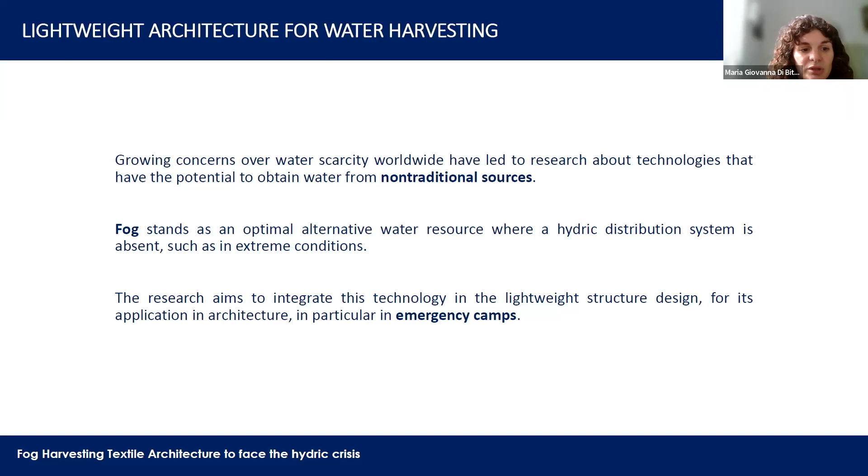So as we know, the water crisis is becoming more and more serious. For this reason, it is important to study non-traditional water resources. In particular, one of them is fog. Fog water has been documented to be an optimal source of water, especially in territories that lack a water distribution system. This is because fog harvesting is a kilometer zero technology, but I will explain this in a moment. So our proposal is to develop a lightweight textile architecture for fog water harvesting to be integrated into emergency camps.

So again, fog is an alternative water resource useful to face the hydric crisis in certain areas worldwide defined as fog oases. The extraction of water from fog is a passive system which works by gravity thanks to the fog collector, which is a device composed of a mesh and a supporting structure. Depending on the location and the components, the water collected can range from 2 to 22 liters per square meter of mesh a day. Nowadays, in the projects developed for fog harvesting, the water is used for agriculture, reforestation, and community use.

Even though it's a promising technology, it has some weaknesses: it is a lone and fragile structure, and the technology has a limited application field. What we are trying to do is to improve its efficiency and expand the application field, for example, in the application of emergency camps.

So what is fog? It is a meteorological phenomenon consisting of water droplets suspended in the air. From a physical point of view, when a saturated mass of air reaches its dew point, fog is generated. There are, however, different mechanisms and conditions for achieving this state, for which it is necessary to distinguish fog depending on the formation process. And not all of them are suitable to be harvested with fog collectors.

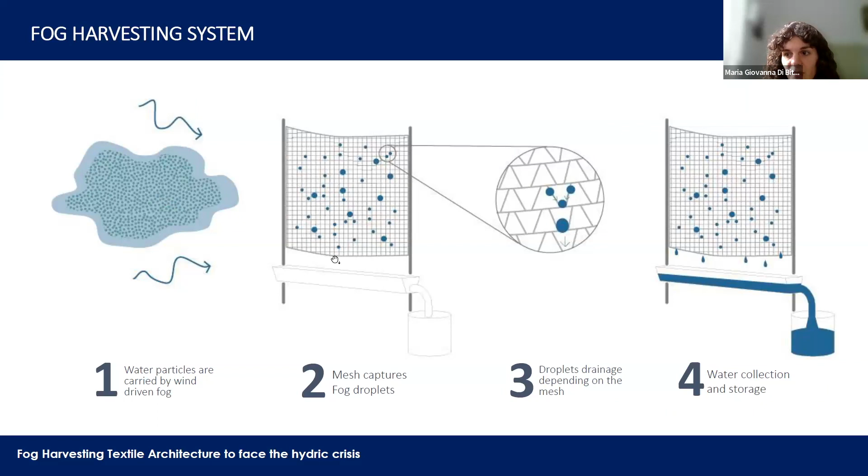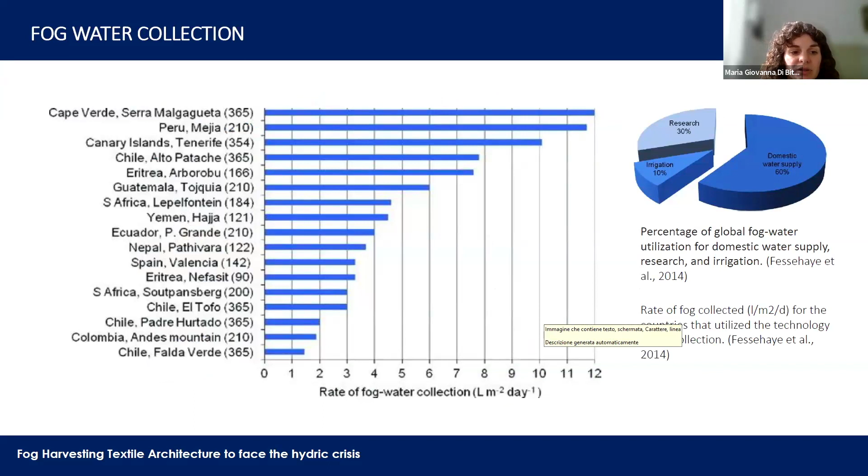So as you can notice from the graph, the quantity of water collected may vary from location to location. Here, for this graph, all the tests have been developed with the same mesh and structure. So it's just a matter of meteorological conditions of the location. So now that we know how fog harvesting works and the device useful to collect water, I'm going to present you why and how we want to apply this technology to emergency camps.

Generally, in emergency, water is extracted from near surface waters like rivers or lakes, which are often contaminated, or from underground aquifers. And when a water source is lacking, it is provided by water tank trucks. And a remedy for these difficult situations can be fog harvesting. Many areas affected by extreme events in need of emergency camps also correspond to fog oases.

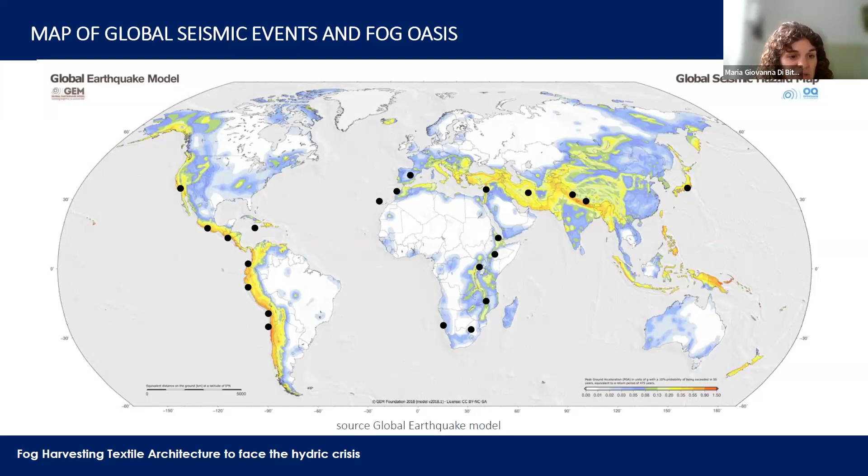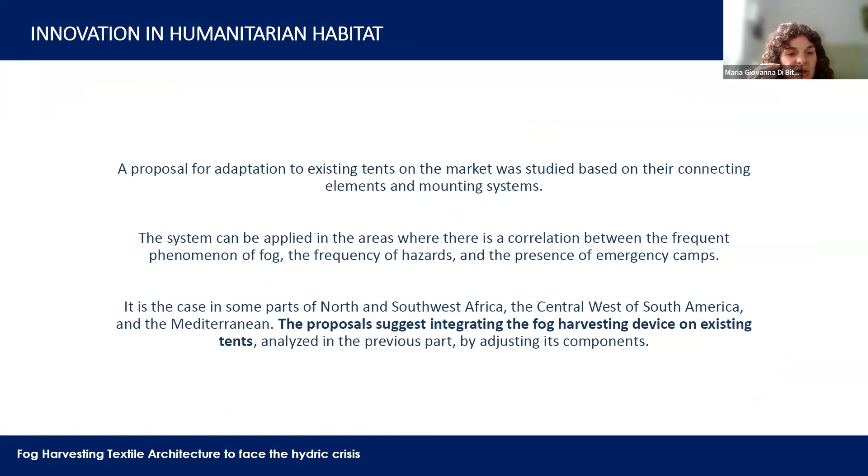So we have seen that the fog collector is a very simple structure, and we are envisioning the integration in emergency camps, and we analyzed some tents.

We took as a reference the multipurpose tent designed for the Speed Kit project, a collaboration between Politecnico di Milano and Ferrino. This tent is already used in many projects.

A single unit can host 5 people and is composed of aluminum poles and joints, all equal. All the connectors are the same, but just by rotating them, you can achieve different angles to create the roof, for example, and this is to facilitate the setup in emergency contexts.

What we were looking for in this study of tents were ways to integrate two systems: the sheltering and the water provision. We noticed that a simple bidimensional fog collector can be applied in many cases, just integrating it using the elements already required for the assembling of the tents. This is useful because we can apply this technology in already existing camps with this type of tent, but also in new ones.

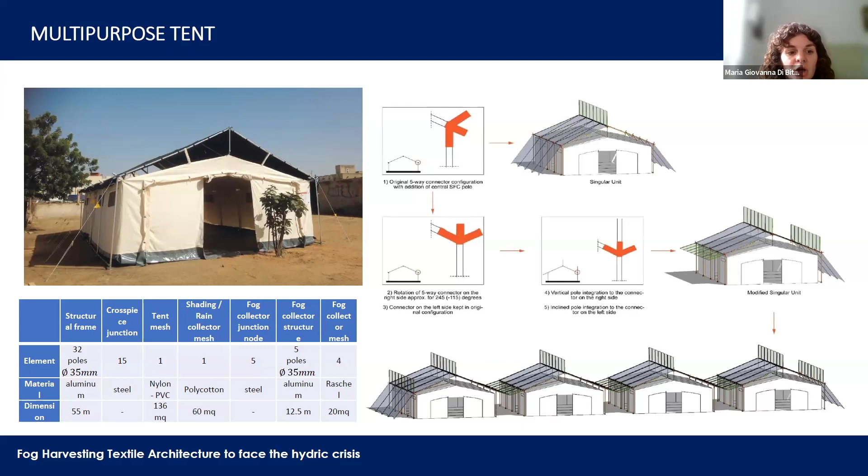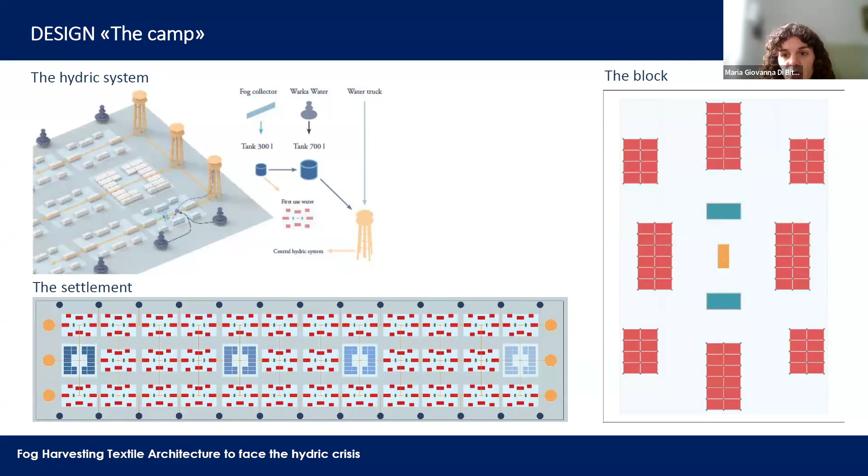Thanks to its design, we can rotate it. So as you can see in the image, when it's standing up, it functions as a fog collector, but by rotating it, it can provide a shading roof for the external part of the tent.

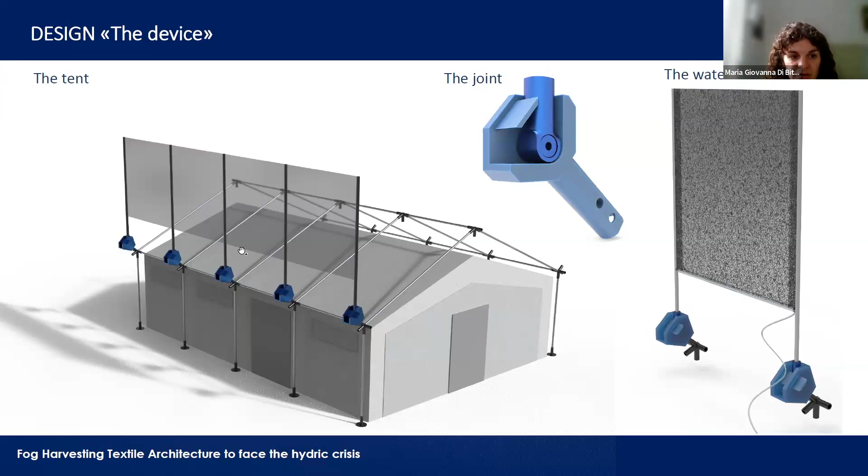We developed an analysis of different territories. Here I'm reporting one of the Sahel region in sub-Saharan Africa, which is also the area where some camps that use the multipurpose tents are located. As you may know, this region suffers intense droughts, but in the last few decades it's also been affected by rainy periods, and some fog harvesting projects have been developed here, particularly in Eritrea and Ethiopia.

So even though it's a very dry region, we can take advantage of the atmospheric water, so rain and fog. The water requirement in an emergency situation per person is 15 liters. In Eritrea, from the literature review developed, it emerged that we can have a collection of 3.1 liters per square meter of mesh a day of fog.

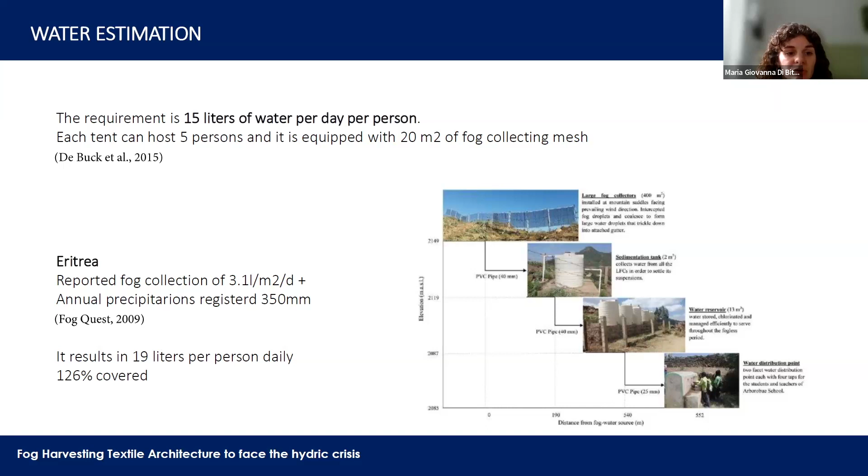If we sum up also the quantity of water we can collect from rain, together with the fog collector applied on tents, we can obtain 16 liters per person a day, even more than the standard requirements.

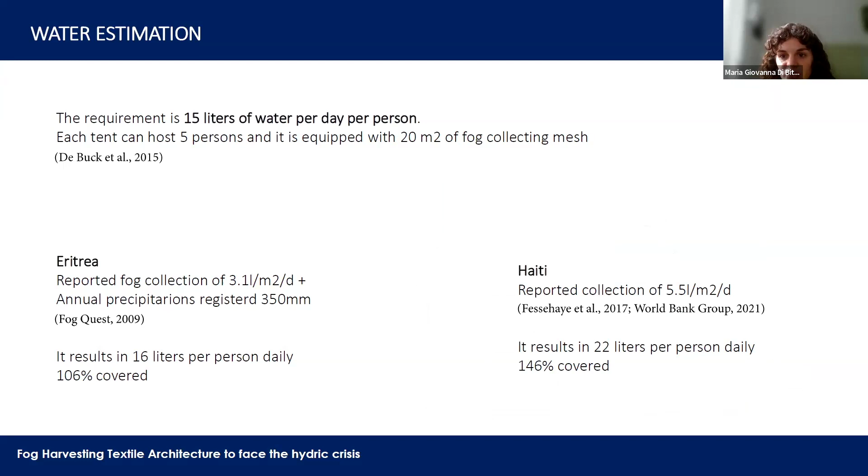We developed another analysis in Haiti, where the collection of fog water reported is 5.5 liters per square meter of mesh a day. In this case, just from fog water, we can obtain 22 liters daily per person, which means the inhabitants can use the water to develop some activities or small businesses, other than just survive.

From an economical point of view, the cost of a large fog collector, the most common one presented at the beginning, is about $1,500, and we can assume the cost of the structure proposed for the tent is almost the same. The collectors we propose are smaller, but there are more of them, so the price should be equal.

Considering a lifespan of 10 years for both the mesh, because after exposure to sun and wind it degrades in 10 years, and the permanence of the temporary shelters, since the tents should be temporary, we can have the cost per liter of water collected be less than the current market price of water in this area to be competitive.

However, it's slightly higher. But in any case, from an environmental point of view, fog harvesting is more convenient because it doesn't rely on energy to function or on water tanks that are supposed to come to the camp.

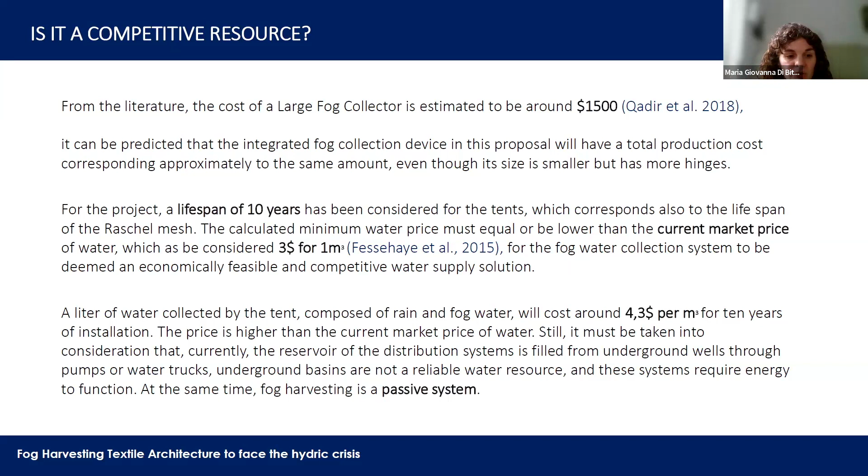Regarding the quality of water, many tests have been developed worldwide on the water collected, and generally they meet the WHO standards, so it doesn't require a filtration system, and it's also less risky to use.

Of course, when implementing a new project, some primary tests should be developed on this water. It usually is not contaminated, unless the location of the camp is near a polluted area like factories or similar.

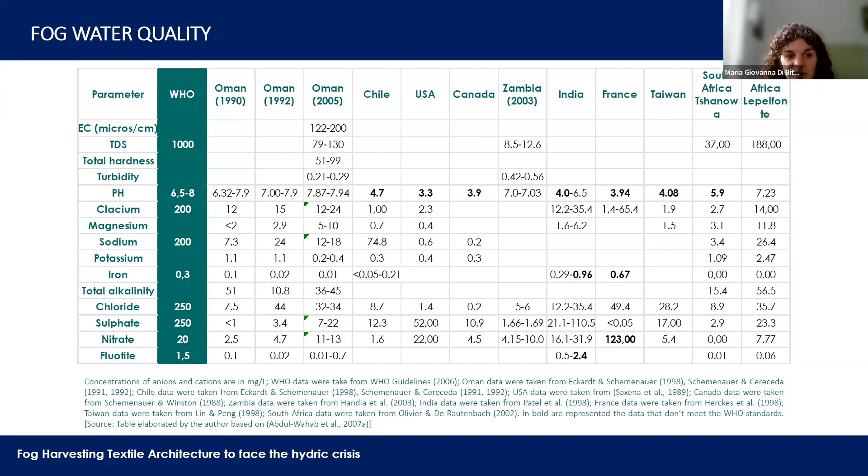Regarding the mesh, here are some examples. In my research, I've tested many meshes, both in the field and in the lab, to test their performance. The most used is the Raschel mesh, which you can notice in the first image, the one used in agriculture. Among the meshes tested there is also the mosquito net and some spacer fabrics.

Considering the price, the mosquito net costs as much as the Raschel net, but it collects almost double the amount of water.

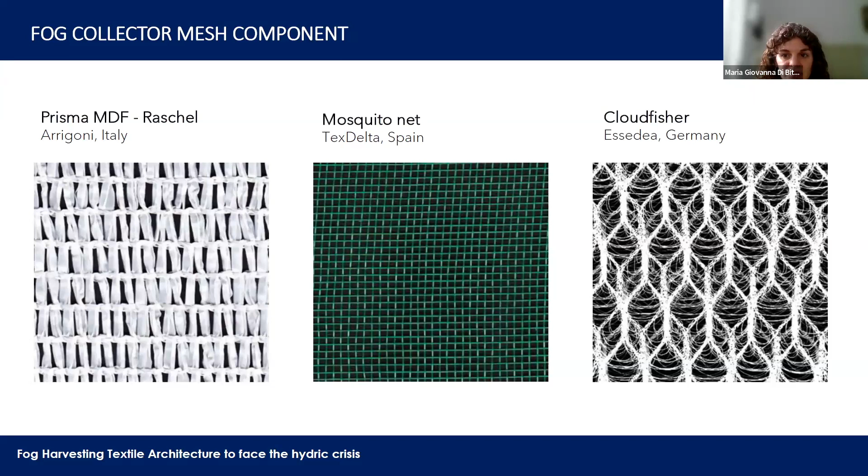The spacer fabric costs 10 times more than the Raschel mesh, but it collects 5 times more. It's also more resistant, so it can resist more than 10 years. Depending on the location conditions and the requirements of the project, the lifespan and the budget, a different mesh should be selected. I must underline that the mosquito net used for this type of project doesn't have the repellent treatment on the surface, so it's safe to use.

To conclude, water is becoming more and more a scarce resource. It is defined as the blue gold of the 21st century. In this scenario, fog stands as an optimal alternative resource in fog oasis locations. So we should give it a try to this new technology. Thank you.

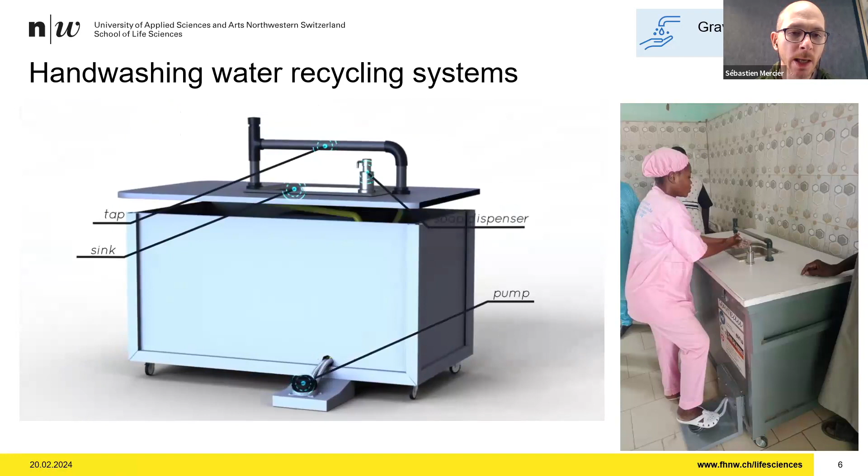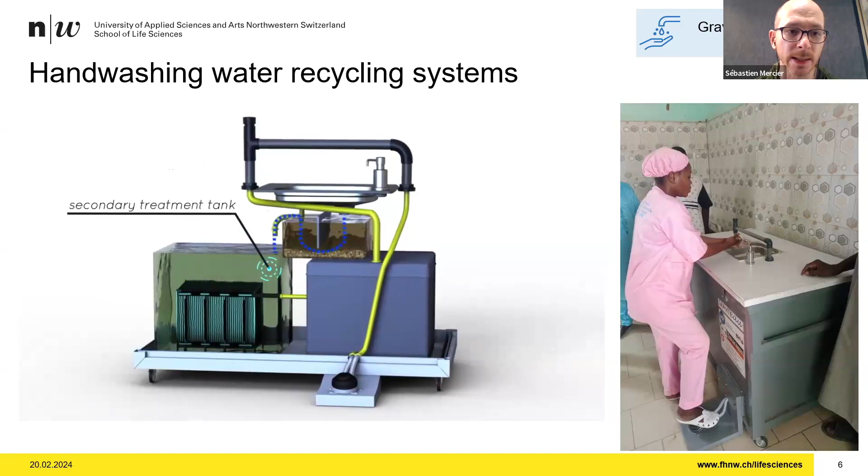So it's a hand washing system activated by a foot pump. By activating the foot pump, water is brought from the clean water tank to the tap. People wash their hands, and then the used water is collected by a sink, and then it goes through a couple of filtering stages.

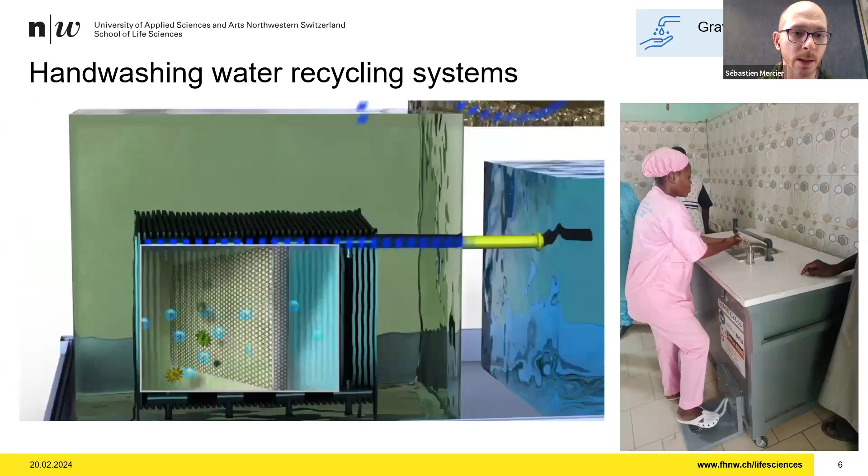First is the sand and grease trap, which removes most of the floating and sinking stuff. Then water goes through the membrane tank, which contains the principal component of the system, the filtering membrane. The filtering membrane removes most of the finer stuff, in particular microorganisms. This filtered water is clean and safe for hand washing, and it fills back the clean water tank, completing the cycle. That's how the system functions.

Now, what are the specificities of the Gravit'eau hand washing system?

As already mentioned, water is recycled, and in particular, water is recycled only through gravity, hence the name Gravit'eau, which means that no electricity is needed for this process. Basically, the only source of energy is muscle energy needed to activate the foot pump.

Since water is recycled, a water replacement is only needed every couple of weeks or so, depending on usage. This greatly reduces water transport in places where water is not available. So no electricity needed, no continuous water supply needed - those are valuable assets for a system to be used in water scarce and remote areas, which is where we work. From our experience and evaluation, roughly 97% of water is saved using this system compared to conventional hand washing systems.

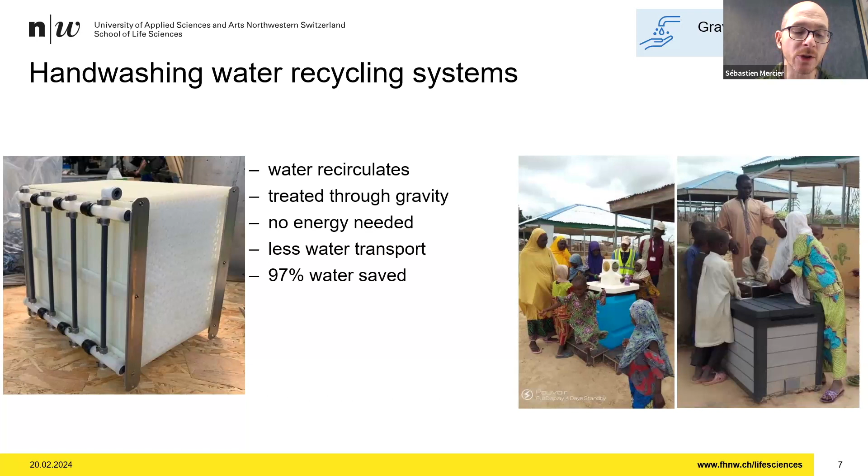Next, I'll talk about the construction of the Gravit'eau stations. One key aspect of our intervention is that we want those systems to be built locally as much as possible. So we have contracted workshops in our countries of intervention: Burkina Faso, Mali, and Nigeria. The staff at those local workshops has been trained, and they build the system. Only small parts and the membrane module are imported from Europe - we send those materials, but the workshop builds the housing and assembles the whole systems locally.

In the course of this Hands4Health project, we have already built over 100 stations and deployed them in healthcare facilities and schools.

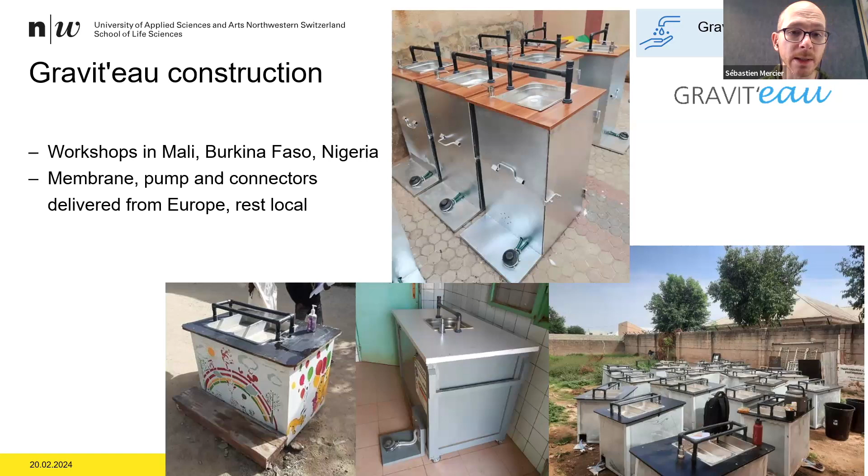Now, installing the stations is the first step. Then we need to make sure that they are properly maintained and monitored. This is done by having a Gravit'eau focal point in each school or healthcare facility. Those people are trained and they know they are in charge of maintaining the systems - cleaning them regularly and refilling the system with fresh water when needed.

We train them, but we also have guidelines that have been developed - not only for construction at the workshops, but also for maintenance and monitoring, because we need to monitor those Gravit'eau stations, done by the Terre des Hommes teams in each country. They have a series of tools to do regular tests on water quality and the integrity of the membrane. We have a specific test that makes sure the membrane is not damaged and that the water is properly filtered and safe to use for hand washing.

We have procedures for that and specific electronic questionnaires installed on mobile devices such as smartphones or tablets. They use those questionnaires to collect data, which is automatically aggregated in an analysis system, so we can monitor all the systems in our project that way. So that's it for the Gravit'eau stations. I'm handing over to Carola again for the other aspects of the project.

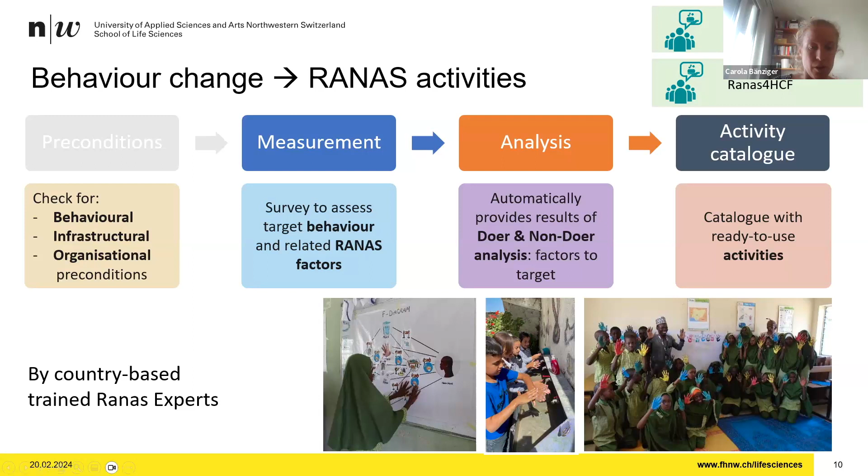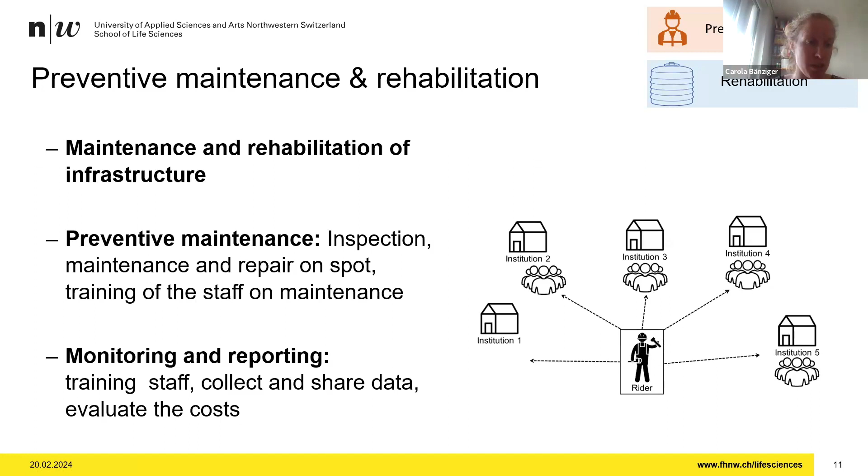We also work with staff that are trained to do repair, that then can cover multiple institutions and support there on the repairs. In Mali and Burkina Faso, we implement WashFit.

WashFit is a risk-based management approach for healthcare facilities, and it's built up on a WashFit team that is built with staff from the healthcare facilities, but also people from the communities, and together they take over the responsibility of managing all the wash infrastructure. So they make sure that there are the finances, and that there is also regular management and monitoring of everything within the wash of these healthcare facilities.

What we achieved is that the Gravit'eau management got taken up also in this WashFit, and in Mali, the WashFit is part of the national standard for healthcare facilities, and in Burkina Faso we are working a lot on that. This also gets taken up by the national authorities. That's a lot on the management and maintenance part.

Other than that, the water quality is an important aspect for us. Therefore, we work on chlorination. So first of all, we evaluated the water quality in schools and healthcare facilities, especially in healthcare facilities. For example, in Mali, there are regulations that the water should be chlorinated, but actually it's not done. So we were evaluating a lot what are the challenges behind the chlorination and why it's actually not done. And we figured out that's a lot connected to dosing issues.

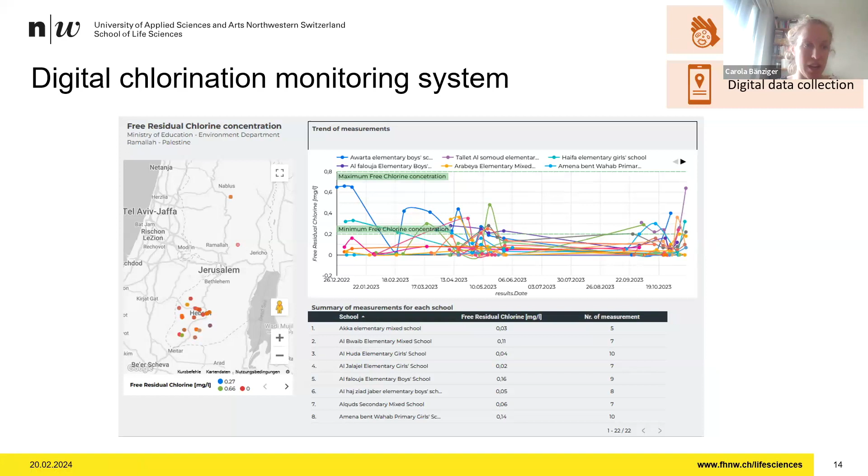And on that slide, I would like to give you an insight on what this chlorination monitoring tool looks like. You can see here schools in Palestine that are measuring the free residual chlorine concentration. And with that, now the Ministry of Education can also monitor if they check the chlorine concentration, but also what the level of chlorine is. And based on that, further actions can be taken.

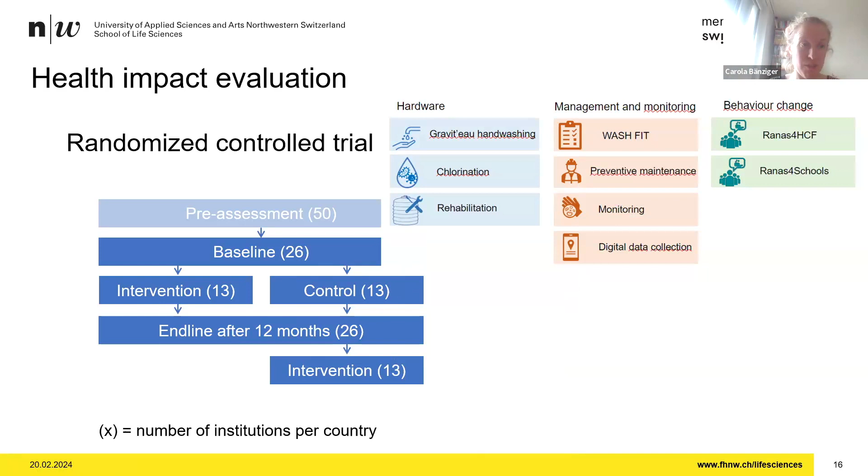So, as I mentioned earlier, this is all part of a health impact evaluation. Therefore, we did a pre-assessment and then a baseline data collection of 26 institutions per country. It got randomized and half of them received an intervention, which is currently happening, a combination of different interventions really targeted to their needs, and the other half of the institutions are the control group. End-line data collection is starting in 2 weeks, and after that the control schemes will then also receive the intervention, or at least the intervention that actually worked.

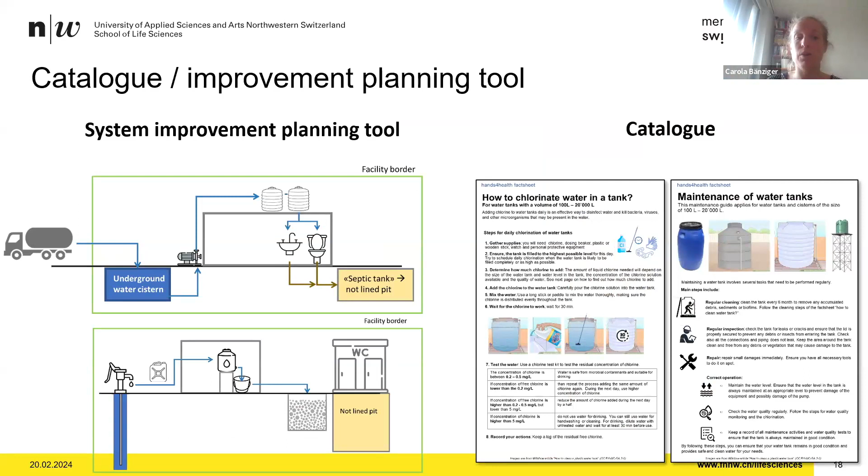And the last thing that I would like to let you know is that based on all the combination of interventions that we are implementing, we are developing a catalog and improvement planning tool that consists of all these different kinds of interventions, so that we can also share our experience, for example, on the chlorination, but also on the Gravit'eau and so on, and it can be used by anyone.

So with this, I would like to end, and we are very happy to answer any question related to the whole Hands4Health project, but also specific to the Gravit'eau. And if we don't find enough time to do that now, we're also happy if you contact us via email.